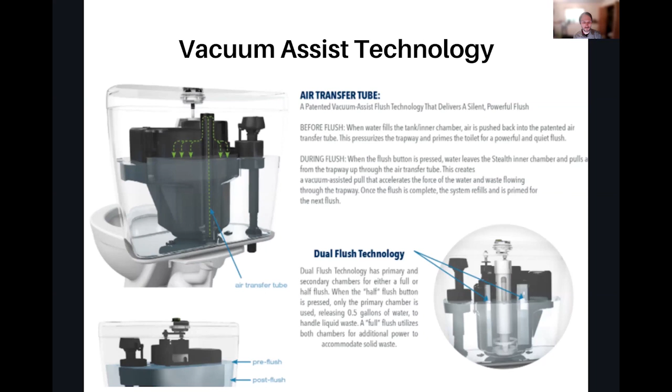What we're looking at is circulating pumps and some different ways that they're being set up and designed as one way to score some different points. And then along with that, we're looking at having certain pipe lengths set up as well, which we're going to talk a lot more about throughout these sessions. And then also that includes pipe volume, very important. And so there's some requirements there for LEED to have proper pipe volume, proper pipe lengths, if you're taking option 1.

Now, performance testing is really what it's all about. That will tell you if you got your time to tap, and that's what we talked a lot about in session 1. And so ultimately, if you can do that test with your rater and you can verify that the performance is there, and by doing the things that are being mentioned today, you're going to get that performance you're looking for to get those points.

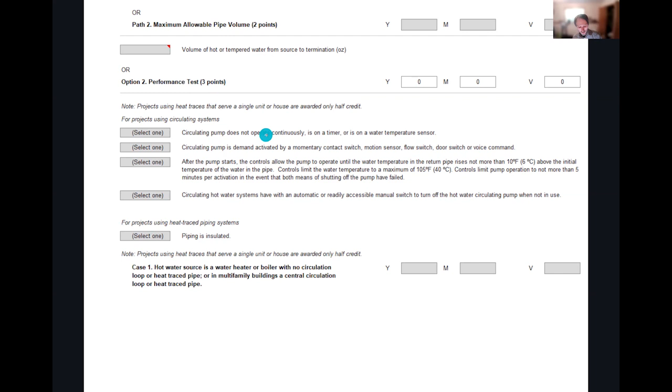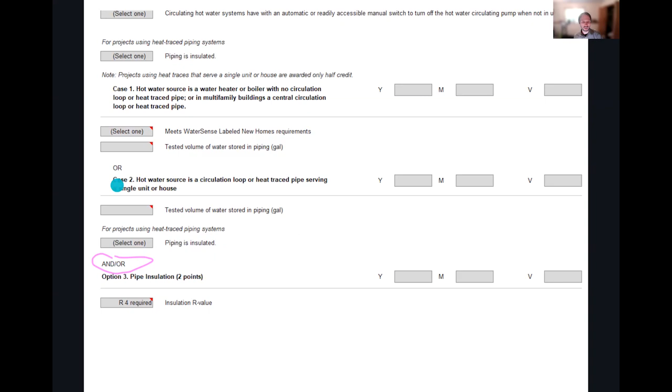And then ultimately, you can score some additional points along with that simply by just putting pipe wrap up to R4 on the hot water lines. So that can be done in tandem with these, ideally, or it can be done as a standalone as well. So those are all ways to score in LEED, and we're going to get into much more detail throughout this session. And so with that, I am going to stop talking and hand it off to our speaker.

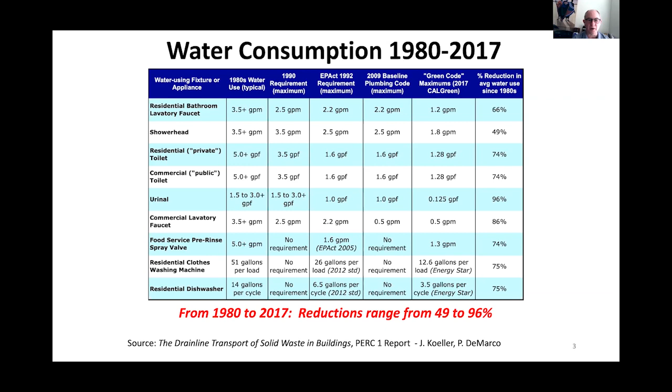What's useful to note is that the research on pressure loss through pipe fittings was actually done in 1892 and published by the guy's son in 1941 for steel pipe and threaded and flanged fittings, and I'm pretty sure we're not installing that in modern buildings for our domestic water.

What are we aiming for? People want the water to feel right. They want their toilets to flush first time every time. They want clean clothes, dishes, and bodies. They want the service of hot water as efficiently as possible. And quite frankly, I don't think we should talk about efficiency until the desired service has been provided.

I've been working on this question for quite some time. And one of the things that I've been sharing a lot for the last year or so is about the question of where did all the pressure go? Why does your shower feel wimpy, and what can you do about it? Well, in existing buildings, it's a little harder to do much about it because they're existing. It's hard to change the plumbing. It's expensive. But there's things that happen in new construction that are inadvertently happening because we're not paying attention to the pressure loss through all the components properly.

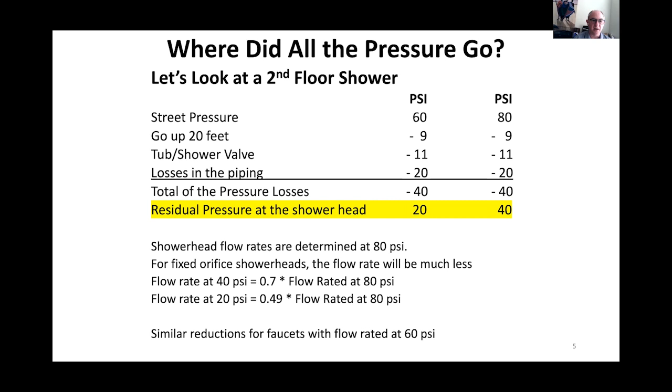And what I want to share with you today is a video that we took a couple of weeks ago in Ann Arbor with the Plumbing Union's training trailer that they have to teach plumbers around the country about these questions of pressure loss and time to tap.

So Brett, if you could, can we share the video? I'll stop sharing. It's all yours.

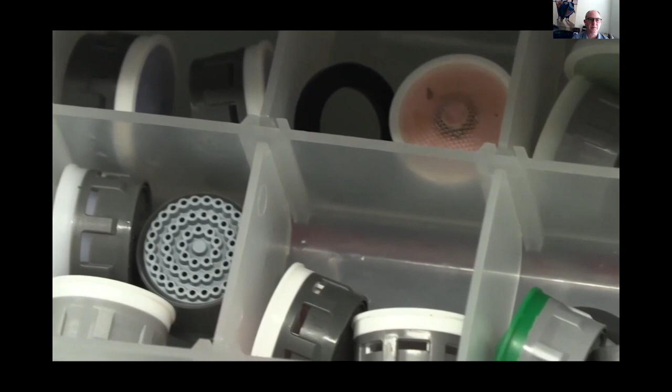Hi, my name is Gary Klein from Sacramento, California. I teach plumbing design for a living. We're here on the UA's training trailer ST1 with the water module we designed in 2016 to teach about pressure drop in modern pipe and fittings, time to tap waiting for hot water to arrive, heat pump water heaters, which are coming along as part of the electrification efforts and decarbonization efforts in the US. And we're going to show you how to pick an aerator that'll make you happy. My goal in the next 30 minutes is to teach you 5 things you didn't know about water. Are you ready?

This water heater is installed incorrectly. Tell me what's wrong. Let's look around it.

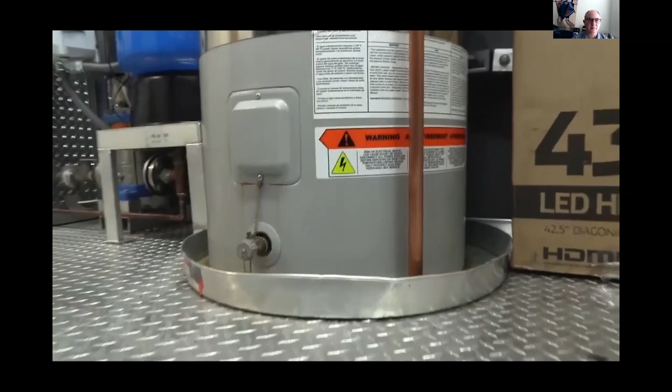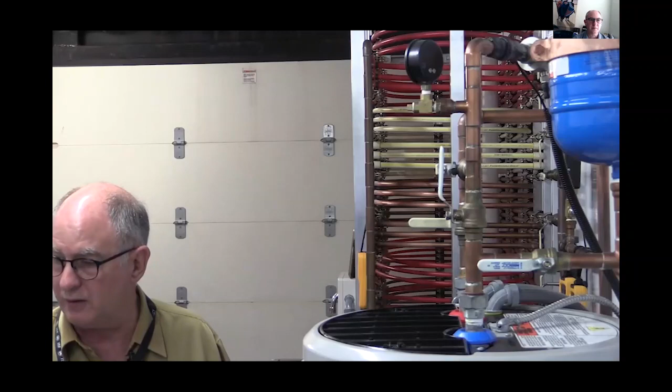There's a drain plug there, that looks good. Electrical probably looks okay, we've got the wiring hooked up. We have a pan to collect any discharge from the T&P valve. That looks pretty good. We have a drain for the heat pump. This is a heat pump water heater that's got condensate, there's a condensate drain.

So what's wrong? I know it's installed incorrectly. Heat pump water heaters use air to make heat. They capture energy out of the air and use it to heat the water, sort of like a refrigerator in reverse. The heat pump's about the same size as the compressor under your refrigerator.

All good? This is the inlet. Where's the outlet? If we reach around back, for here, you can feel the air coming out. So what's the problem?

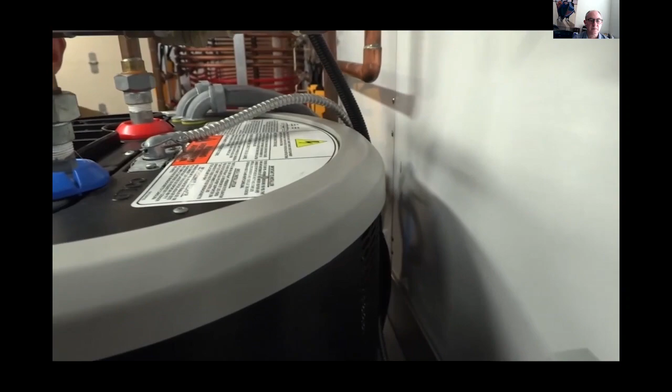We forgot to read the manufacturer's instructions. The manufacturer's instructions say it's supposed to be 7 inches of clearance to the wall, and we only have 3.5 to 4. So it's installed incorrectly. It still works, but it's not what the manufacturer said they needed.

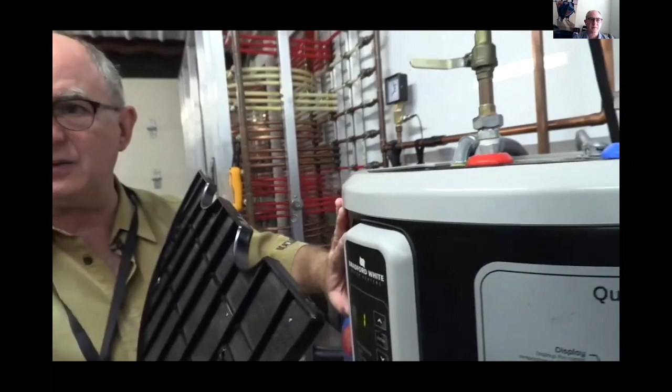Now the other part of the thing, so that's one thing we didn't know, right? Water heaters have filters. This is an inlet filter, it's a screen to collect dust bunnies and pet hairs. Why? There's a coil inside here that gets gunked up if dust bunnies and hair get on it, and now you have to come clean it. In the meantime, the efficiency of your water heater that you just bought went down. How much? A lot.

So one of the things we have to be sure to teach people about is the airflow for heat pump water heaters, in and out, and that we have a filter we have to pay attention to.

This heat pump has the opportunity to run on 4 different modes. We have it set on heat pump only mode. We could be a hybrid mode, which is a combination of heat pump and electric resistance. We could be resistance only, and we could set it for vacation when we go away.

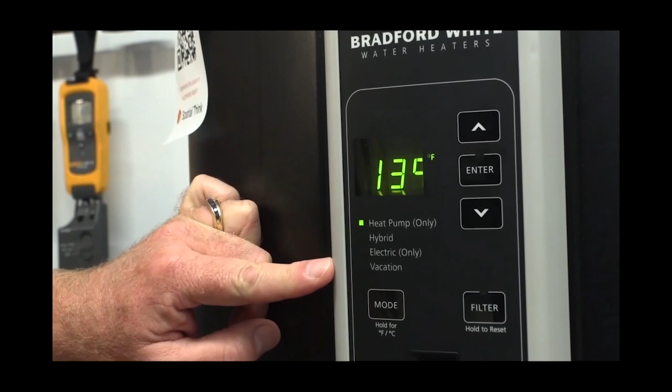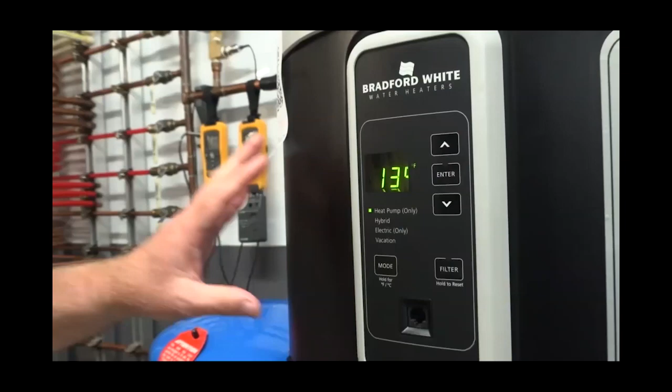There's 3 or 4 manufacturers of what's called unitary heat pump water heaters here in the US. They all have similar products. In the next 2 or 3 years, we're going to see 120 volt heat pump water heaters that you can retrofit into houses that don't have big 240 volt service for water heating. All that stuff is coming, it's part of the electrification push in the United States to decarbonize how we make heat.

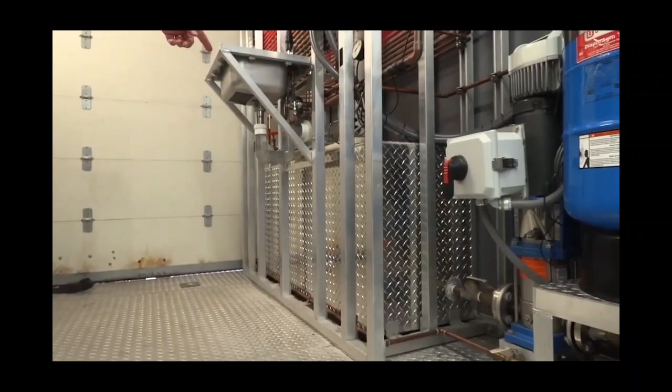So that's part 1. Now let me tell you about what we have here. We're on a trailer, and we had to figure out how to bring a whole water system here on the trailer. Down here in that silver tank, that's our reservoir, stores 150 gallons of water or so. Here's our pressure pump and pressure tank to create system pressure.

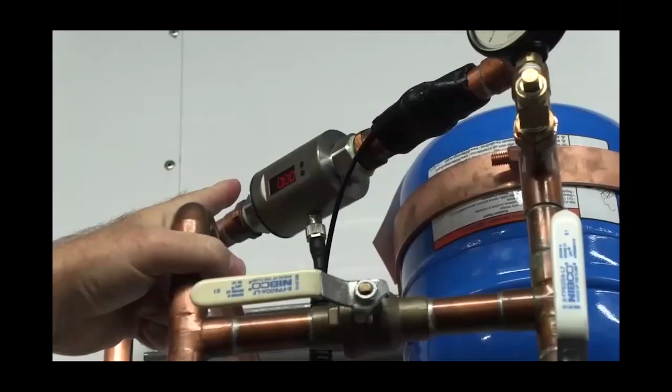They're right in the middle. We currently have pressure set at 80 psi, which is about the maximum allowed by most plumbing codes for going into buildings. This is our hot water source, and we have the ability to choose in and out for hot water or just cold water. The cold water goes, all the water we measure goes through this flow meter, so we can tell how fast the water is moving. And here's our plumbing system over here on top of the tank.

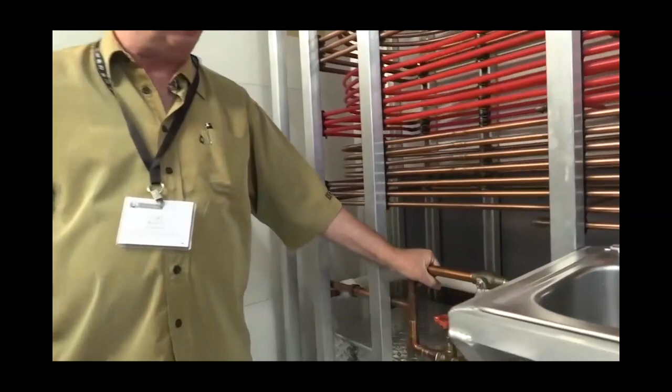To create flows, we have a sink, which if we turn it on, gives us a flow of water. This one's about 1.6 gallons a minute. Or if we really need lots of flow, we have bypass valves over here where you can move the water very quickly, up to 10 or 15 gallons a minute.

So this is our system. Now we're going to do some experiments. We're going to teach some things about how water moves. So let's try pressure drop through modern pipe and fittings.

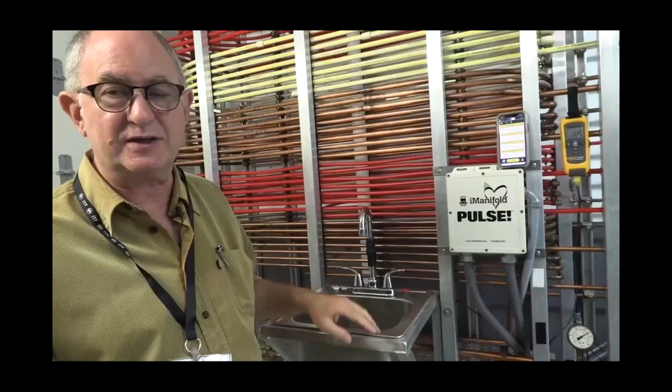If you look here on the rack, there are 5 different combinations of pipe without fittings, pipe with fittings. That's Pex, CPVC, copper, all in 1/2 inch. And then we have 3/8 Pex with and without fittings and 3/8 copper with and without fittings. There are 50 feet of pipe with and without fittings for each combination. When you have elbows, in this case, there are 14 elbows in the system.

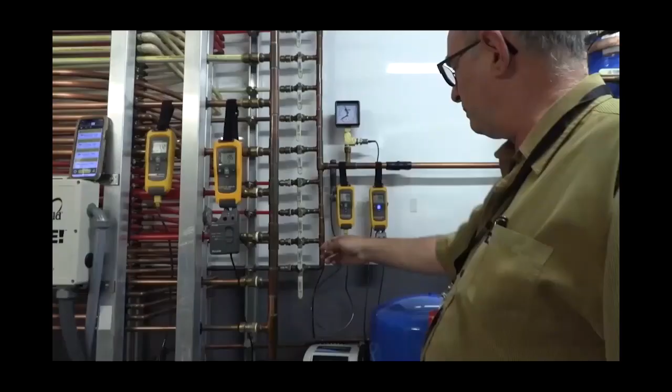So let's do an experiment. Let's pick one of these pipes. How about we pick 3/8 Pex, no elbows, and we'll measure the pressure loss at about 1.5 gallons a minute. We'll set it up for that, okay?

So we open the valve to decide which pipe we want to run. We're going to watch that flow meter and these two pressure gauges. This is pressure in, that's temperature in. This is pressure out, that's temperature out. Pressure is measured here and here, temperature is measured here and here.

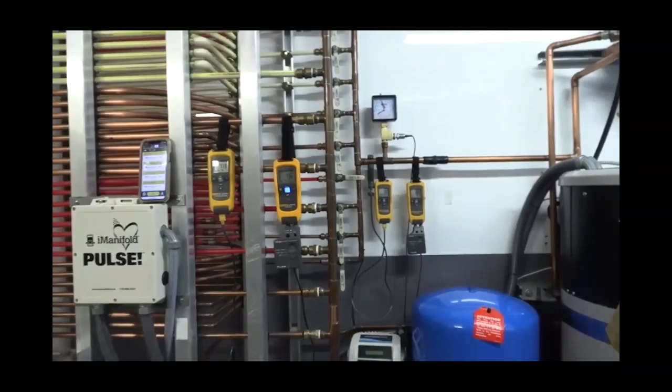So we're ready to run the test. I'm going to turn on the tap, and we can watch all our pressure gauges right here on my screen on the iPhone. It's a very clever system from Fluke—it does Bluetooth to the phone or your iPad, and you can literally diagnose what's going on in your equipment pretty quickly. So I'm turning on the flow.

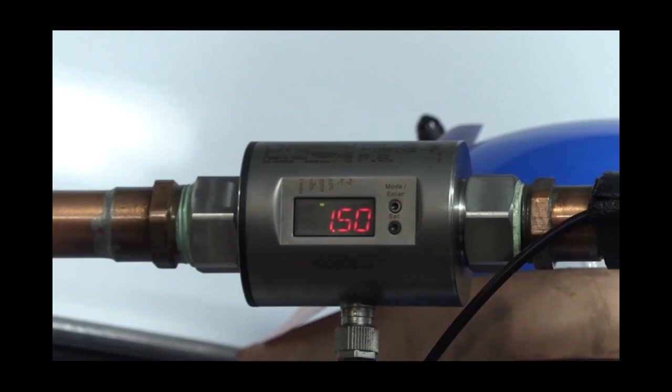The flow meter is up there over the water heater. Why don't we pick about 1 gallon a minute? Instead of 1.5, we'll pick 1 gallon a minute. Nah, let's go up—I like 1.5. And it looks like we're there, about 1.5. Let's not get hung up on it being too perfect.

All right, so what do we have for pressure loss? We have on the two gauges, P1 is at 74, P2 is at 61. We're losing about 13 psi at that flow rate.

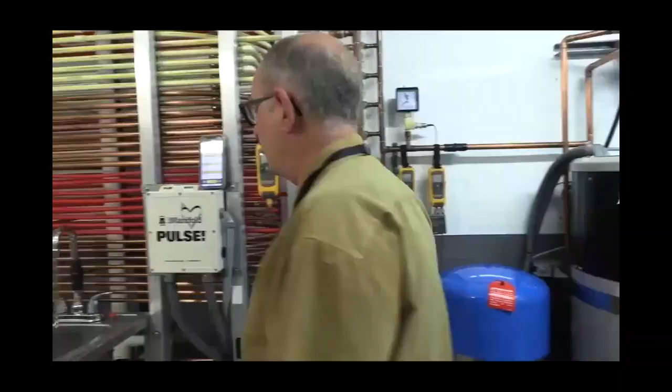Now what I'm going to do is switch to 3/8 Pex with 14 elbows. All I've done is switch from one pipe to the other. Let me check my flow rate, which by the way went down from 1.5 to 1.36 because there's more resistance. Now I'm going to try and bring it back to 1.5 gallons a minute, and I can't do it with this aerator. There's that much resistance to pressure.

So what's the pressure drop we're getting here? 79 minus 46, so that's 33 psi of pressure drop. That's because of the fittings—insert fittings make a big difference.

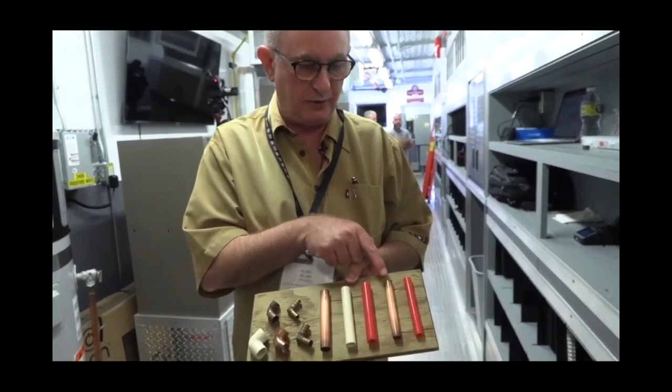Okay, so here's an example of what we actually have on the trailer. These are the pipes we're testing on the trailer and the fittings that go with them: 1/2-inch copper, 1/2-inch CPVC, 1/2-inch Pex, 3/8 copper, 3/8 Pex. Copper 1/2-inch fittings, CPVC 1/2-inch fittings, Pex 1/2-inch fittings, 3/8 copper, 3/8 Pex. If you look carefully on the insides, you can see how big the inside diameters are, both of the pipe and of the fittings.

And what you notice is that the inside fittings—the fittings for Pex that are insert fittings—affect the waterway. They're inside the pipe. The copper and CPVC are outside the pipe.

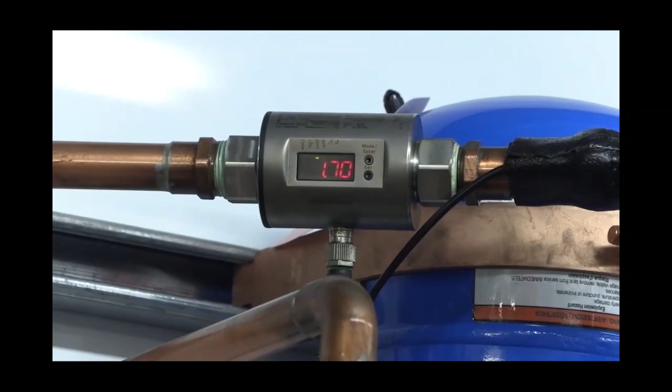So now let's switch to another pipe. Let's go to 3/8 copper, no elbows. What's our flow rate? Without changing anything, it went up to 1.7 gallons a minute. I'll bring it back to 1.5. And we're almost there, okay.

Well, why am I so focused on flow rate? Customers want their showers to feel right. They want 1.5 gallons a minute at their faucets, 2 gallons a minute at their showers. Whatever it is they want, we want them to get, and we have to design systems that give that to them. So we have to understand and account for the pressure loss in the pipe and the fittings.

Now let's switch it to copper 3/8 with elbows. And we're at 1.5 gallons a minute, a little bit less. And you know what, we still only have 5 psi of pressure loss. So all those 14 elbows in copper only added 1 or 2 psi to the pressure loss at the same flow rate. Not much loss for those fittings, right?

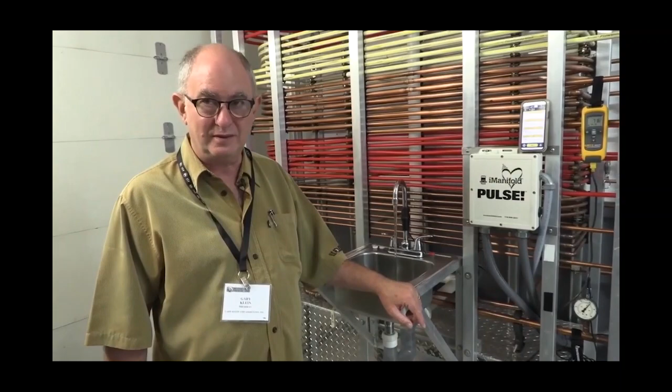That's the point. All right, let's do one more experiment because it's fun. Let's pick CPVC 1/2-inch, no elbows, and run 1.5 gallons a minute. Didn't change much when we went from 3/8 copper to 1/2-inch CPVC—it turns out the inside diameters are similar when all said and done.

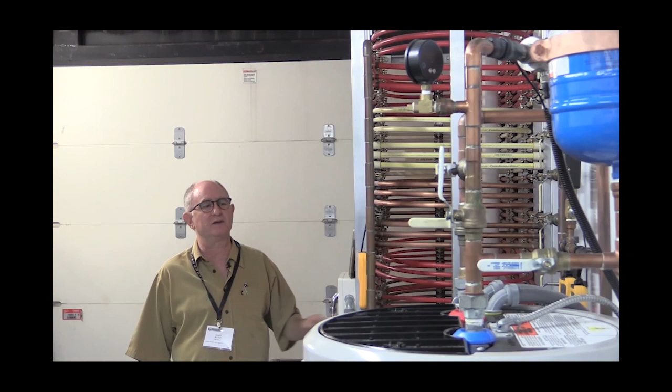And we're at about 1.5 gallons a minute, and our pressure loss is 78 minus 75, 3 psi. So the system without any elbows for CPVC is similar to copper with 14 elbows. One more experiment.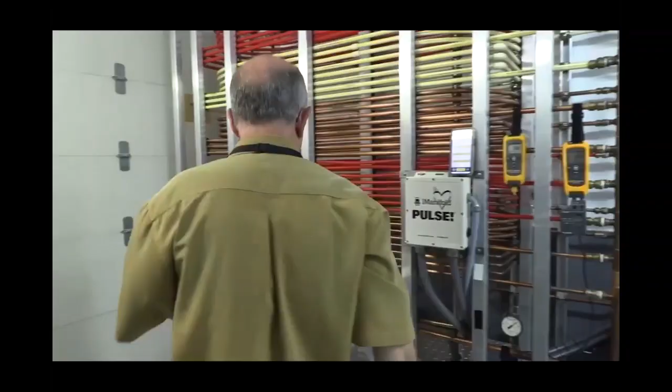Whoops, I've got them both open. I don't want them both open.

Now we have CPVC with 14 elbows, and the pressure loss is still only about 3 or 4 psi. Outer fittings don't affect pressure loss as much as insert fittings do. That's the big deal, so we have to pay attention to it.

All right, now before we leave pressure drop and pipe and fittings, I want to show you some of the experiments we've done.

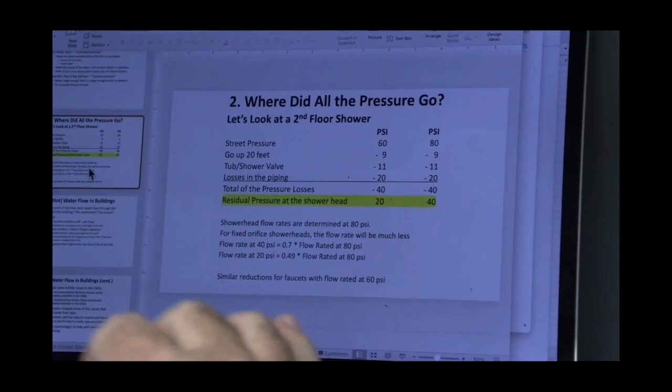Why is it so important? First question is, where did all the pressure go? Well, the plumbing code says we're not supposed to have more than 80 psi going into our buildings. Most of us don't have 80 psi to begin with. We have 60 to 70. Sometimes we're as low as 40. So this discussion is about where did all the pressure go and why your shower feels wimpy.

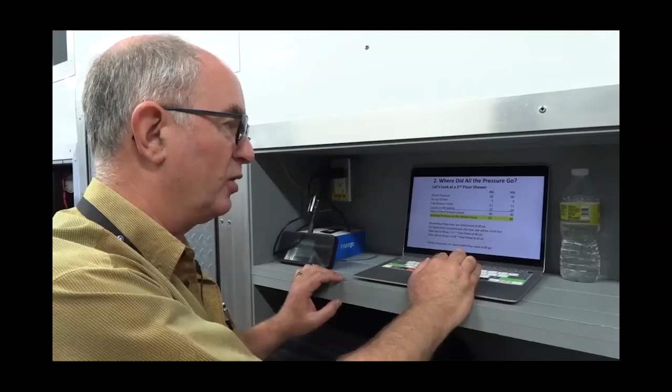You start out with 80. You lose 9 in pressure loss when you go to the second floor. You have no choice, it's elevation. There's losses in pressure through the anti-scald shower valves that are required by code now. And then there's losses in the plumbing, and I'm going to say they're about 20 psi. In some cases, 20 is a high number. In some cases, it's a low number. I can explain where all of these come from. When you're done, you're losing somewhere around 40 psi when your shower is flowing.

That means you've only got 20 to 40 psi coming out of the shower valve headed to the shower head. Here's the problem: shower head flow rates were determined at 80 psi. If you only have 40 psi, you're going to get 1.4 gallons a minute. If you only have 20 psi, you're going to get 1 gallon a minute. And if you didn't think you liked 2 gallons a minute much, you're going to hate these other two. There's similar things that happen with faucets, but they start at 60 psi.

So what we're going to do is jump. Oh, I got to go this one. Here's the rules - this is the bizarre part of all this. The pipe sizing rules were written down in the 1940s by a fellow named Roy Hunter with the National Bureau of Standards. That method of sizing water piping in buildings is still in use today with numbers from the 1940s. Nothing flushes or flows at those rates anymore. So why are we using those rules?

There's something else we should know: the pressure loss in pipe fittings was published in 1941 by the son of the guy who did the research in 1892 for steel pipe and threaded and flanged fittings. And we don't use that for our plumbing systems either anymore, for domestic water systems. So why are we using those old numbers? Because that's all we have. So I decided to get new numbers - that's what I've been working on for the last 10 years. We know about time to tap and volume to hot. We'll get to that.

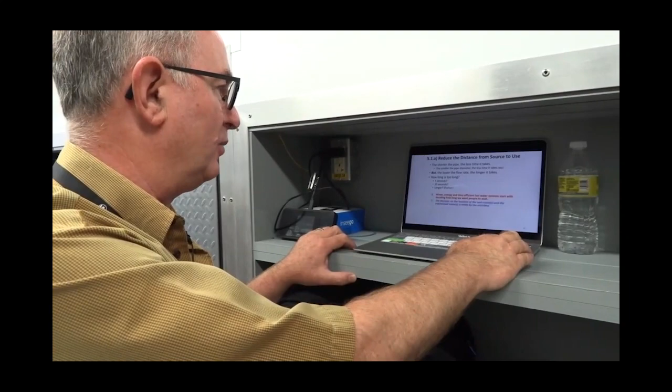There's a new method of sizing water piping called the water demand calculator. You can see the link here, it'll take you to the home page of the website that has this on it. You can use it in any jurisdiction in the United States. It's a standard that was developed by IAPMO, and it allows you to right size the plumbing for single family, multifamily, and single apartments within multifamily occupancies. We're working to extend it to other occupancies, but we haven't got there yet.

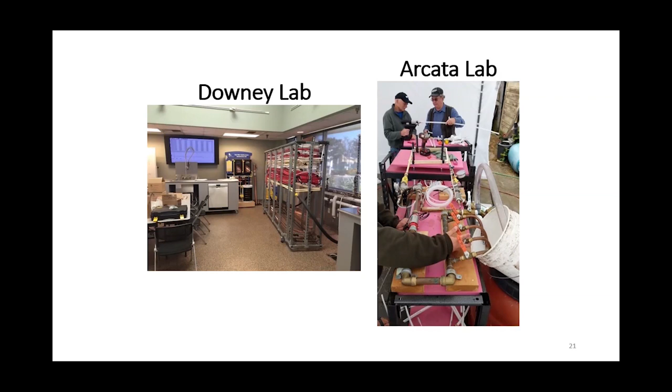We've set up a lab. You can see this one, that's version 1. It's very similar to what's here on the trailer. Version 2 is here on the trailer. Version 3 is up in Arcata, California. What we've done is we have a testing cart and we have the test segment cart. See the rectangular spiral? There's 10 elbows there. And instead of 50 feet of pipe, which is what we have here on the trailer, there's 16 feet of pipe with and without elbows.

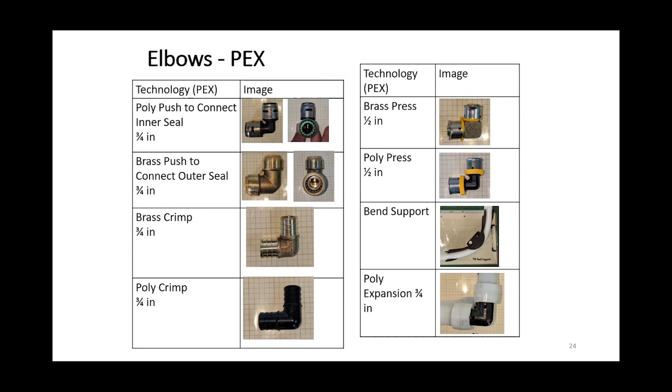You can see some of the things we've tested. I want you to pay particular attention to elbows, sweeps, and swoops. And I want you to pay attention to the tight radius, the tight corners, the hard 90s, and this long radius bend support. We've looked at couplings and tees, and we have data on the pressure loss in modern pipe and fittings.

Here's one of the most important things to pay attention to. I've circled 2.9 gallons per minute here because it's 4 feet per second. That's the flow rate I have to set this equipment at in order to get the pressure loss that we're measuring here. And at 4 feet per second, 2.9 gallons per minute is higher than virtually everything flows in a dwelling today, right? Legal shower heads in the US are 2.5 gallons per minute, but that means there's only some on the hot and some on the cold. It's not all hot or all cold, so it's less, right?

Bathtubs are filling at about 2.93 gallons a minute. Big master tubs with a 3/4 valve on them, they might flow 7 to 10 gallons a minute - they're bigger. Toilets are 3 to 5 gallons per minute when they're filling, even though they're 1.6 or 1.28 when flushing. What matters is the fill rate.

So we're going to pick 3 gallons a minute, 2.9, and that tells us here the pressure loss is about 0.05 per fitting. There's 3 different fittings in here, and they're all around 0.05. Hold that thought.

Now let's go to CPVC. To get 4 feet per second, I set my equipment at 2.3 gallons a minute. But I live in a house that wants 2.9 gallon per minute stuff. That's what I want, right? So now I have to look between 4 and 6 feet per second to get my actual velocity and pressure loss. It's right here around 5. It's 0.2 psi per fitting.

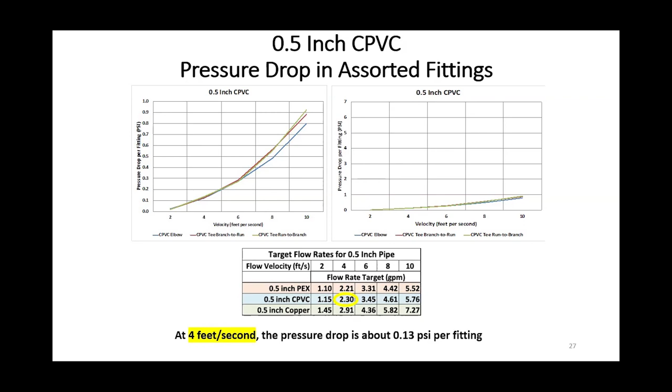So these fittings are about 4 times more pressure loss than the same fitting would be in copper at the same flow rate. It's 4 times bigger. It's a big deal. Now let's look at PEX. Here's PEX tees and couplings. Here's PEX elbows. What we have here is that you can see groupings. This is one fitting type. This is another fitting type. This is a third fitting type.

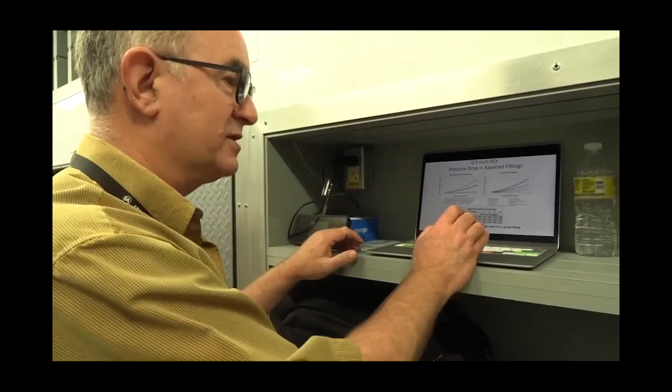If I did my analysis with the pressure loss down here somewhere and someone picks one of these fittings, it's not or equal. The system is very different in the wrong way. All right, so we're going to pick 5.5 feet per second, 2 psi per fitting compared to 0.05 per fitting. I'm pretty sure if you do the math, that's 40 times bigger. We have to be careful of our choice of fittings, particularly when they're inserts, because they really do affect the waterway.

All right, so look at that one at 0. That's a bend support. We pointed it out earlier. That bend support keeps the radius of curvature big enough so that the water doesn't know it changed direction from a pressure point of view. It's a very cool thing to have. We can build that in copper. We can probably do it in CPVC, but we absolutely have bend supports for PEX.

The difference, even at 10 feet per second, is 0.05 psi per foot, which is really in the noise of what we're measuring. Our equipment isn't that accurate. This is within the noise. So I'm going to say they're almost the same.

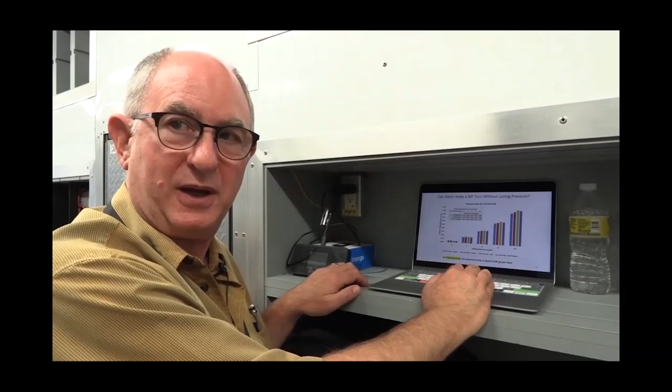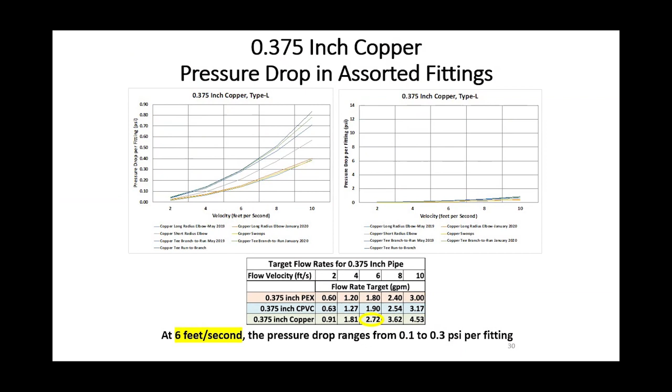We've done the same analysis for copper and PEX at 3/8. I still want my 3 gallons a minute. In copper, I'd have to be a little over 6 to do it. So I'm up here, and the worst one is probably 0.3 or so PSI per fitting.

Okay, it's smaller diameter. You'd expect it to have higher pressure loss. And in PEX, to get 3 gallons a minute, I need 10 feet per second. The plumbing code doesn't want us to go past 8 feet per second in most cases. So we have to pick carefully the things we attach to 3/8 PEX because of the additional pressure loss at the higher velocities.

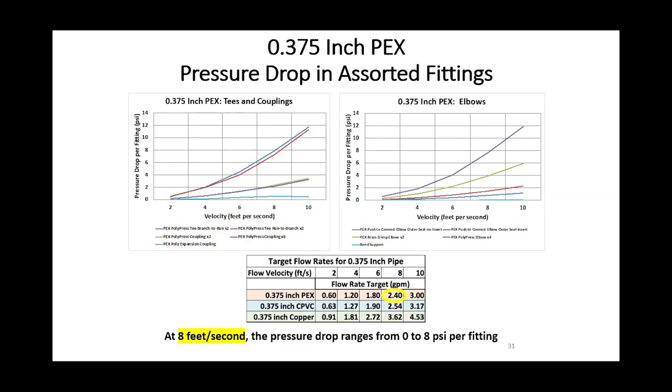And we've done the same analysis for the bend supports and curves, coils, and we've got straight somewhere, but these are bend supports. And you can see that they're all very similar, just like they were for 1/2 inch. Bend supports are a really big deal.

What I want to cover now is the pressure drop through tub shower and shower valves. Look at the picture. We've got valves from different manufacturers, all US brands, in price points between about $85 and $150. Stuff that goes in most of our homes, most of our apartment buildings.

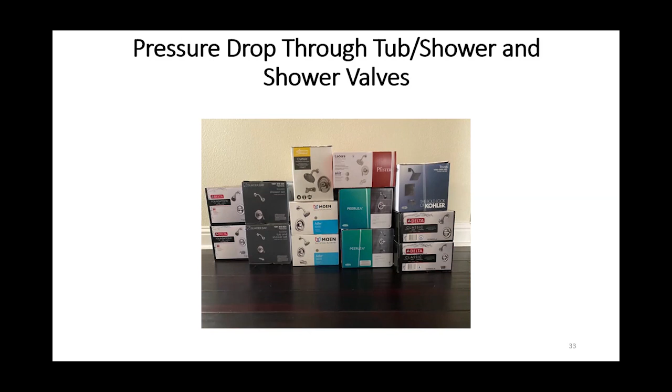And what we did is we set up an experiment using our pressure lab to look at the pressure loss when the water flowing through the valve, not through the shower head or the tub spout, but through the valve, was 0.5 GPM, 1 GPM, 1.5, etc., as far as I could go until I ran out of available pressure in my lab. And that's at about 50 PSI, by the way. And so what we find is this.

If you have a shower head at 2 gallons a minute, the shower valve with the least pressure loss is around 5 PSI, and the one with the most pressure loss is about 17 PSI. And so when you're designing, if this is the range, you'd pick the 17 to 20 PSI per shower valve loss. And when you come back with an or equal, it's going to be less pressure loss in your system. It's a really good idea for doing it that way because you don't know what's going to actually get built when you're doing design.

If you know, then you can build for it. My recommendation is to put in a bit of a safety margin. It's always good to have less pressure loss than more. So that's what we try to teach. We've done the same thing with tub spout fillers.

And what you find in most buildings is because of the drop through the valve at 3 gallons a minute, it's 30 PSI through the valve. You're up on the second floor. You only started with 50 PSI. You only have 10 left. And the problem is you need more left in order for the valves to work right. And so we tend to see flow rates claimed to be 4.5 gallons a minute. We rarely see that for most tub spouts. But this tells us what to expect.

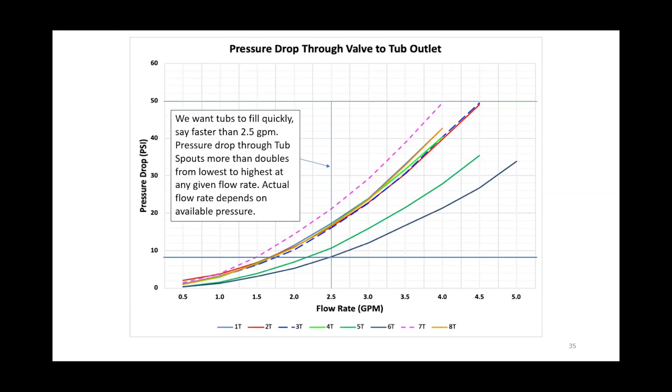Now I want to show you something about faucets and shower heads. Remember we talked earlier about the 80 PSI coming in and losses for elevation, losses through the valves. I picked 11 in the example, and then there's a bunch of loss in the piping, right? So what we have is this.

If you buy a shower head, it's rated at 80 PSI by its product standard. If you only have 40 PSI, instead of 2 gallons a minute, you're going to get 1.4 gallons per minute. And if you only have 20 PSI, which some folks do, you're only going to get 1 gallon per minute out of the fixed orifice shower head.

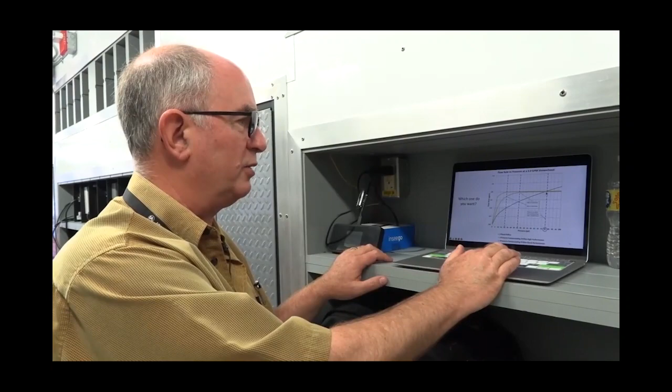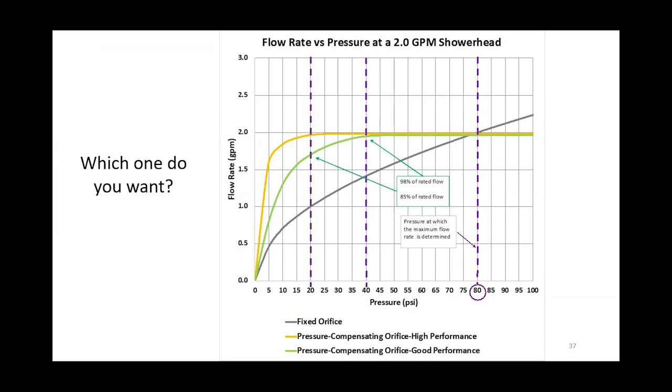What if you could have an orifice that adjusted for pressure, which kept the flow rate more similar to what you bought at 80 throughout a wide range of pressures that are available? So 85% at 20, 98% at 40, and all the way out to 80 PSI and more, you're going to get most of what you thought you bought. That's what customers want. That's what I want people to buy.

And the flow regulator for the showers looks a lot like this one for faucets. That O-ring is what compresses when pressure is high and relaxes when pressure is low and gives you more constant flow over a wide range of operating pressures. That's what we're teaching. Now, let's switch it to faucet aerators.

Faucet aerators are really cool. They're rated at 60 PSI. How come they're not rated at 80? I don't know. It's the product standard. All right? But it's at 60, and the same problem occurs. That gray line is the normal pressure flow curve.

If you start with 2 gallons a minute at the faucet at 60, and you only have 30 psi, you're going to get 1.4. And if you only have 15 psi, you're going to get 1 gallon a minute. If you buy a faucet aerator with one of those single cores in it, you'll get 78% at 15 psi and 94 at 30.

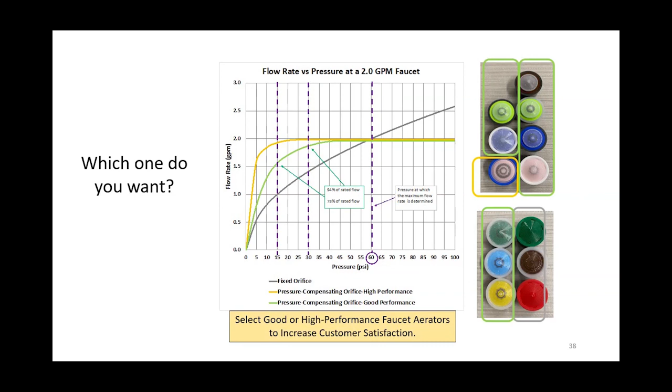But if you could get one with a dual core pressure compensating aerator, which you see here, you're going to be on the gold line. And the gold line means you get 95% from 15 psi on up. That's what I want in my house. Why? I don't know what the pressure is going to be at any given time. No one knows. But I want my faucets to operate at what I thought I bought them at.

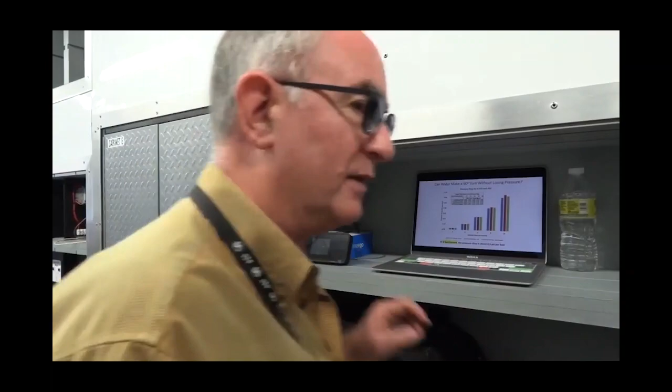1.5, 2, 2.5, whatever it is, faucets and showers, I want them to operate close to what they were rated at their pressure for the test. That's what we're looking for. All right, now let's go back over here and do another experiment. What I'm going to do is set the flow rate in cold, and then I'm going to switch the valves when we say go.

And then what we're going to do is watch T1. We're going to lap it when it starts to rise. And then we're going to watch T2, which is over here, and we're going to lap it again when it starts to rise. We'll lap it one more time when it comes to 105, and we'll stop it when it hits 120. That's the experiment we're going to run. Okay? So first I have to set flow rate. And we're going to set it at about 1 gallon a minute.

The reason we pick 1 gallon a minute for this simple experiment is because we can do all the math fast in our head. Doesn't matter what the flow rates are, it's all proportional. So we are at just about 1 gallon a minute. You can see it up on the flow meter. I'd say we're pretty close. And we'll get ready to do our test.

So here's what's going on. Between T1 and T2 is 0.6 gallons of water in the pipe. If I'm moving water at 1 gallon a minute, we would expect to have hot water arrive in 36 seconds, 0.6 times 60. It's going to take longer. The question is how much? Why does it take longer?

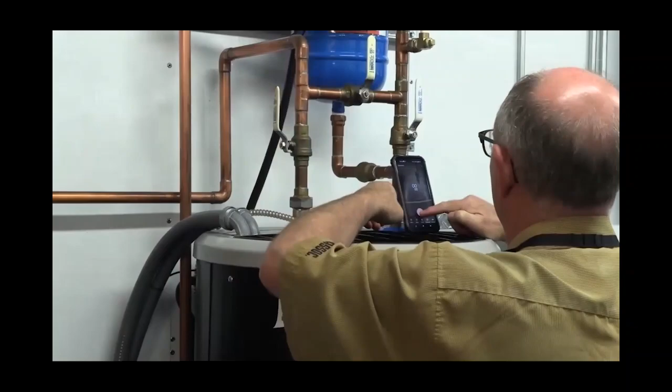We're watching T1. It's at 76, and we're going to lap it when it starts to climb. And we'll see it start to climb now. And we lapped it. Now it's 89 degrees. You can see it climbing over here. T2 at this end is still cold, 76, 77 degrees. When it starts to rise, we'll lap it, and that will happen in about 30 to 36 seconds from the start.

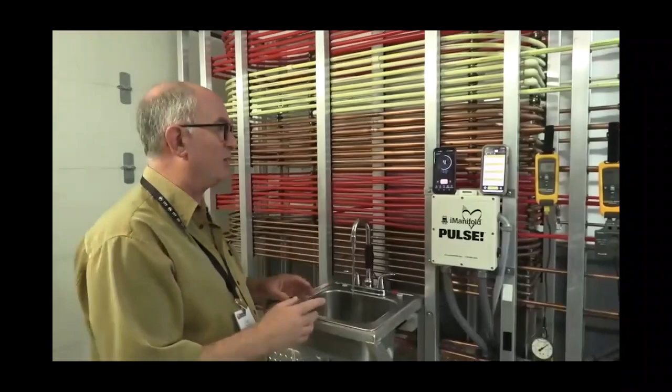We're currently at 36 total. We have to add 10 seconds. So at 40 something, it should start to rise. Now, there we go. That's how long it takes to clear out the cold water that's in the pipe. And now it's going to start to rise. Notice that T1 is already at 130. T2 is climbing. When it hits 105, we'll lap it again.

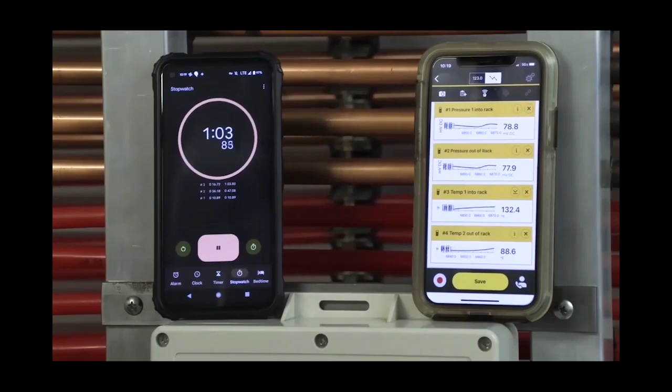Why 105? That's the temperature I'm willing to get in a shower at. If it's cold, I don't want to take one these days. 95, 97, 99, 100. It's climbing quickly now. 103, 104, 105. And now we're going to wait for it to hit 120.

And what's interesting about this is, I don't know about you, I'm standing in my shower, I'm willing to get in at 105, but as the shower warms up, I have to adjust the mix on the shower valve. It's all because everything is warming up. And we'll stop the experiment now.

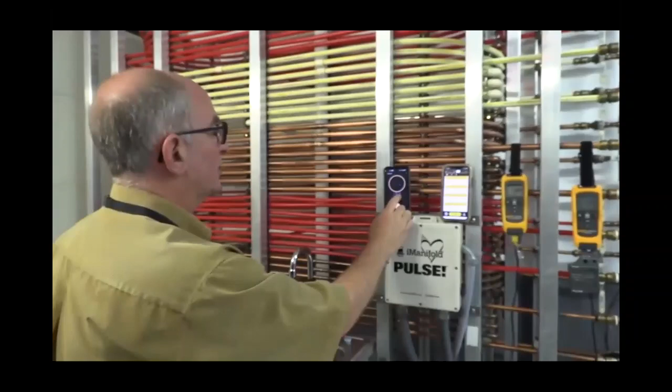All right, so let's talk about the lap times. It took 10 seconds for hot water to reach T1. It took another 36, 37 seconds until the temperature at T2 started to rise. It took 1:16 minus 10, which is 1 minute 6 seconds. Call it a minute, it's close enough for this estimate.

It took 60 divided by 36, not quite 2 to 1, for the hot water to actually reach 105 at T2. And then it took additional time till it reached 120, and that's what happens when you're in your shower, when you have to adjust the handle a bit more cold because everything's warmed up.

What I want to show you now is how different aerators work. The first thing I want to show you is the little air gap here on this flow regulator for faucets. We call them aerators. The air gap means that it's bringing in air and it makes champagne bubbles. This aerator doesn't have an air gap, so it's going to give you a clear column of water. And we'll demonstrate that in a minute.

And the last thing I want to show you on these two, which are the same flow rates, maxed out at 1.8 at 80 psi. If you look very carefully, there's a little toggle here on the front of the aerator, and you can adjust where the flow rate actually hits the sink. If it's not centered quite right, you can recenter it. It's very cool. So what I'm going to do is to put in the first aerator.

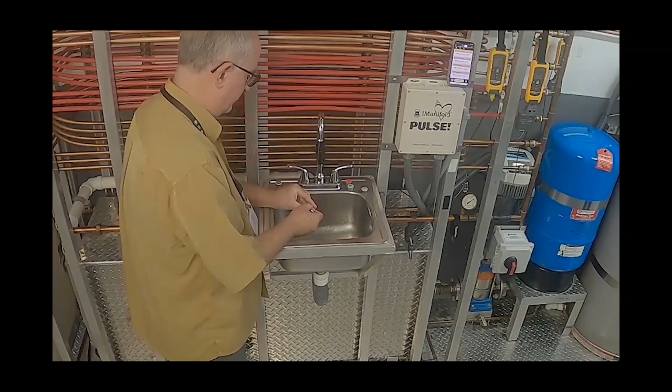Got a problem. First, I'll put in the aerator with the holes. You know, I don't know why we call them aerators. Aerator means to add air to the water, right? But we all call them aerators, no matter what they do. And there's a lot of choices, way more than you would have guessed.

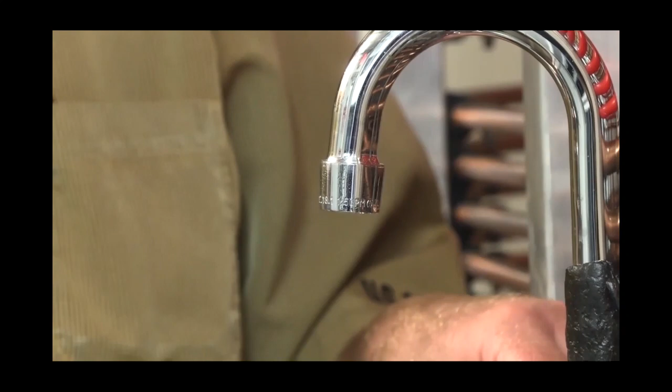Hey, Dan. So, here is champagne bubbles. It's foamy. You can see it, right? And what we're able to do, I told you about that toggle, I can change where the water hits the sink just by adjusting it. Now let's take that out and put in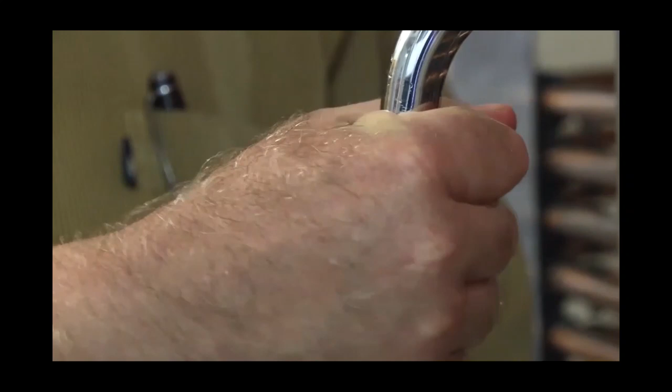laminar flow. Same flow rate, different stream flow. Turns out there's 5 different stream flows for faucet aerators, right? There's lots of different tips. There's lots of things you can get as special features, but here's the basics. Laminar flow. It's a clear column of water. Some people like clear columns of water. Other people like things that look like a shower head. Other people want foamy bubbles. You can pick the flow rate and pick the stream flow.

Now I want to show you one of my favorite low flow aerators. This is for public hand washing sinks mostly, but hey, you could use it in your house if you like it. Particularly in the powder room where people are just rinsing their hands anyway for the most part. And this one, called Mikado, looks like someone weaving a basket with water. It's really very nice. And it cleans your hands, which is its purpose.

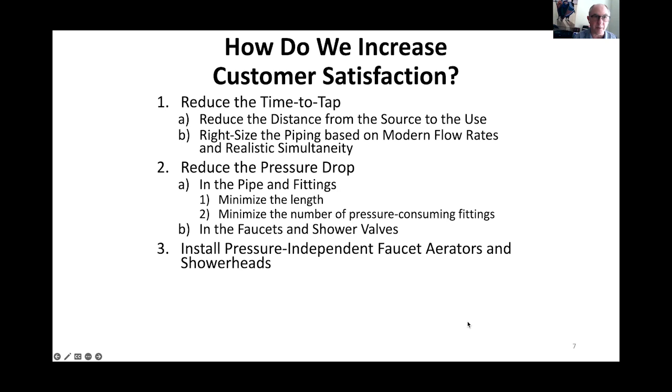All right, so we're given a floor plan. Some of us on the call are architects, others are builders, others are energy raters. The architect, and if the client's involved, the client decide on where to put the wet rooms. The bathrooms go wherever you choose. Some people want to have a big bathtub with a view out the back window. My house in California comes with one of those big tubs with a view out the back window.

I'm fortunate, I actually have a view, but a lot of people have exactly the same house with exactly the same bathroom, and their view is of the neighbor's window across the two lots. And sometimes the view is good and sometimes it's not so good. But people do that all the time because that's the way production construction happens. And so the architect and the client decide where the wet rooms go. Once that's decided, the builder and the plumber have no choice but to put that in and connect A to B so the water doesn't leak.

We did a research project for the state of California. The final report has been published, where we examine the architectural compactness and what would happen if you were able to reduce it from what was typical to something that was more compact, putting the wet rooms closer together.

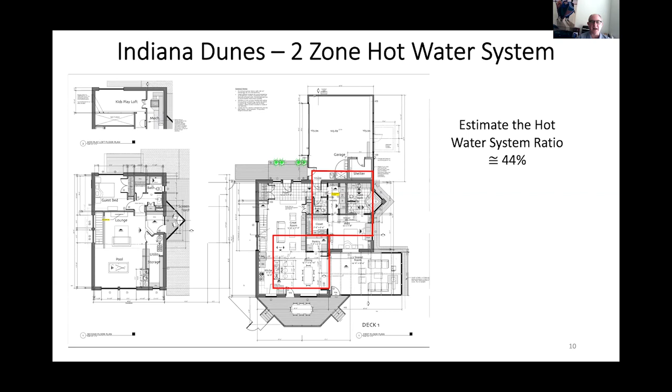What if we thought of the plumbing as a 2-zone hot water system rather than a 1-zone hot water system? And instead of one big rectangle, we look at it as 2 smaller rectangles, right? The water heater is somewhere right up here, right? It's up here. And so as long as the water heater is roughly at this point, that's the right bounding conditions for both of those rectangles. And if we design the plumbing as some plumbing goes this way and some plumbing goes this way, we'll have 2 smaller diameter systems because we've separated them from 1 to 2. And the ratio goes down to less than 50%.

Now let's look at one of the projects provided by Jake Viersen, who's on the call with us today.

Jake, are you able to join us? I am here. So this is a project that's still being priced out, is that correct? That's correct.

I'm still in design, or rather in pricing. Got it, so the design was done, you're the builder, you were given this floor plan, and now you're going to hire a plumber to put everything together. Correct.

And we've talked about this earlier today, the hot water system ratio is about 50%. It's one floor above the other floor. Why did we get 50%? The mechanical room is up here.

I think that's the second floor, but I don't know where the water heater is going to be in that space yet, right? So it could be on the outside wall, it could be on the inside wall. It's got to avoid those closets, those doors, so we got to pick one of the sides to do. I don't know where it is, I've assumed for the moment it's an outside wall.

Okay, and so with the water heater here, I have a toilet there, so I didn't have to go quite that far. The sink is there, there's the lavvy, there's the shower, the tub shower valve. I like that. Oh, I had to go all the way to the outside wall because on the first floor, there's a sink right on the outside wall, so I have to go from left to right across the whole space.

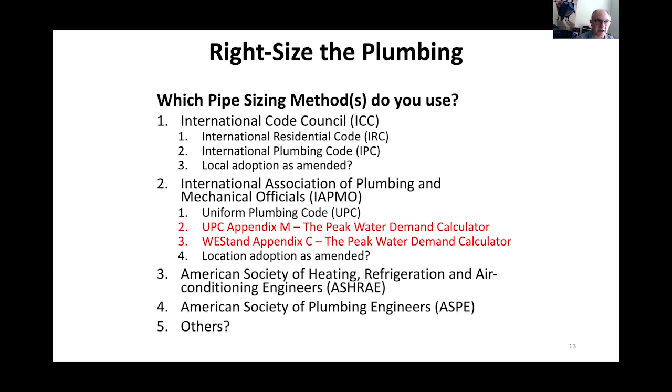So I want to right-size the plumbing now. I said we would talk about that. We have available to us a new method of sizing water piping that's based on modern information, unlike the stuff that's embodied in all of our codes.

The water demand calculator is a method for estimating the demand loads for the building water supply and principal branches for single and multifamily dwellings. What does that mean? It means from the water entrance to your building, including the size of the meter, all the way through to what I call the twigs. So there's trunks, branches, and twigs. The trunks come from the water main. There's a branch that goes to the water heater to make the hot water system. There's a branch that goes off to feed all the rest of the cold water in the building. And then the twigs are what you connect to - your faucets and your showers and your toilets all get connected by a twig to either hot or cold or both. The water demand calculator does not address the size of the twigs, it addresses the size of the branches and mains.

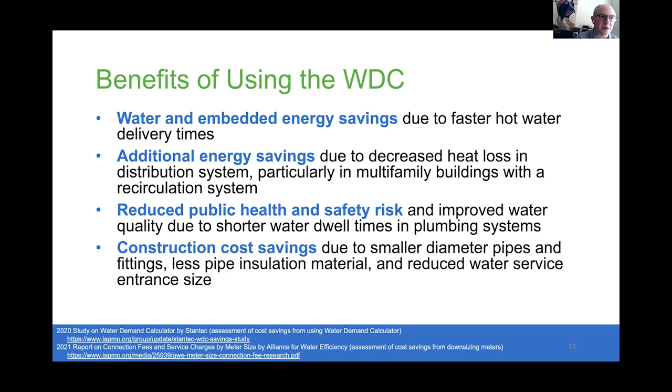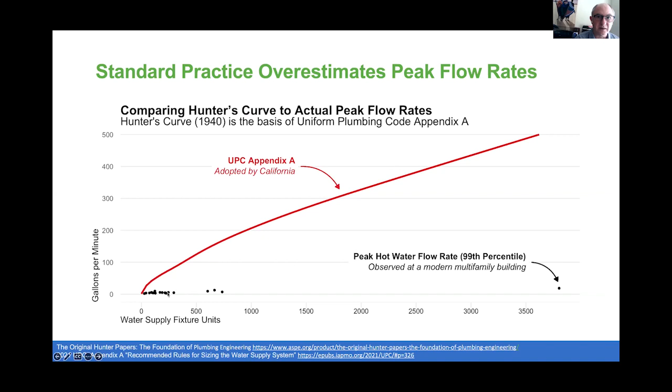And now you can see we're looking just at this part of the curve, and you can still see the letters and the dots. They're not even close to the red line. The red line is the plumbing code prediction for that building. And here's what we've measured.

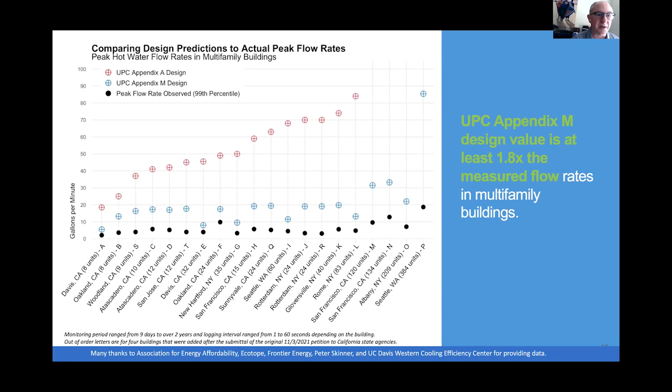But the water demand calculator is what you see. It can be used in all jurisdictions in the United States. You access it in different ways depending on your code jurisdiction. You pretty much always have to ask for alternate methods and means, but if you're using Appendix A or E in the IPC, you have to ask for that anyway. This is just another way of right sizing. It's very helpful. We've used it in upstate New York, I've talked about it before. It's been in design now in several parts of the country. I'm aware of over 5,000 single-family dwellings having been built using this method, probably closer to 6,000.

Notice that we've never measured more than 4 gallons per minute hot or 5 gallons per minute cold. So even 10 gallons per minute, as the water demand calculator estimate would be, is still a good safety margin. But can you imagine going to the plumber and the building officials and saying, well, instead of a 3-inch main for my 35-unit apartment building, I want to put a 1-inch main in? Some version of 'you've got to be kidding' will come out. But it works. It's true. We've got data to support it.

The right sizing of the plumbing saved first costs. This is showing you from 2020, almost 2 years old now when I did this estimate for an apartment building in Seattle. We took the plan from the architect and the plumbing engineer, redid it with right sizing according to the water demand calculator, and we got rid of all the fat pipe. That saved us about $5,000 in first costs.

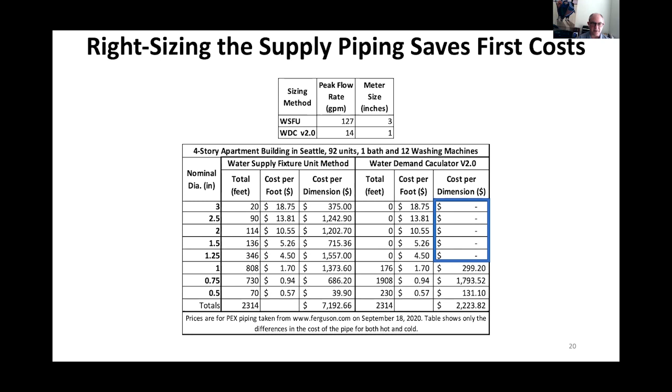When you take all of those costs and add up the right sizing of the rest of the plumbing, remember you get the hot and the cold, all the fittings, the pipe insulation, the hangers, all of the valves and other pieces of equipment in the mechanical room. You get to right size the water heater, which is a big deal, and you get to right size the meter, also a big deal. Your first cost savings are somewhere between $600 and $1,200 per apartment in first cost reductions, based on 2020 dollars. I'm sure it's worth more now.

And then you get annual operational savings. At the moment in this chart, only those shown are for the water costs. We're not including any energy savings, and you will get energy savings. Why? Smaller pipe takes less volume to clear out, and if you have to clear 1.5 to 2 times the volume each time you want hot water to arrive, you'll save some energy there, and you'll save energy when you're running a smaller diameter recirc loop. So, given human nature, it is our job to provide the infrastructure that supports efficient behaviors.

So the water savings that we have identified come from less wait for hot water to arrive because we've cut the diameter of the pipe down by 1 or 2 sizes. That affects how long it takes for hot water to reach the fixtures, all other things being equal. And that's the water savings we're accounting for.

So, PEX, my understanding is that's the direction we're headed, for cost. Right. And I don't know how inflation and shortages of materials have affected copper versus PEX, and maybe you can speak to that briefly. But we were well on our way to transitioning to PEX. CPVC, I don't see it anywhere. Maybe it works somewhere, but my understanding of PEX is that it's supposed to, at least in theory, be more energy efficient as far as heat loss through it versus copper.

So it sounded like, from listening to you, it's these interior fittings. Maybe that's the problem with PEX, or maybe you can explain a little bit more. So, have you seen anyone try to make those fittings exterior? Could that be a solution, or just what are your general thoughts there?

There are exterior fittings for PEX. One of the brands is called SharkBite. They grip around the outside like those finger torture thingies that we used to get as kids, right? They grip your fingers, they won't let them move. It's the same idea for the SharkBite type fittings. And the waterway is not affected that way. So those fittings tend to have pressure losses that are very similar to what you'd see in copper or CPVC, which is a big deal.